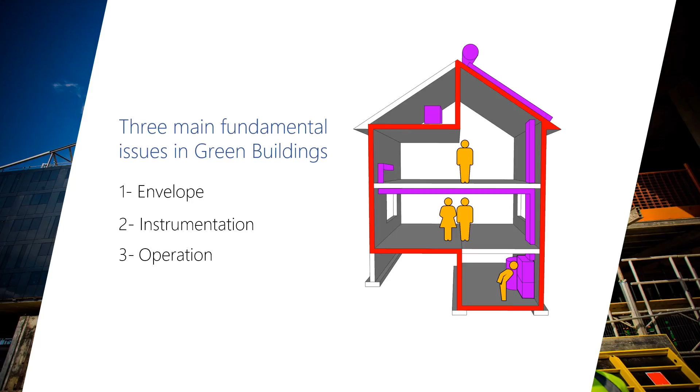Now we will explain each of these items briefly. Envelope.

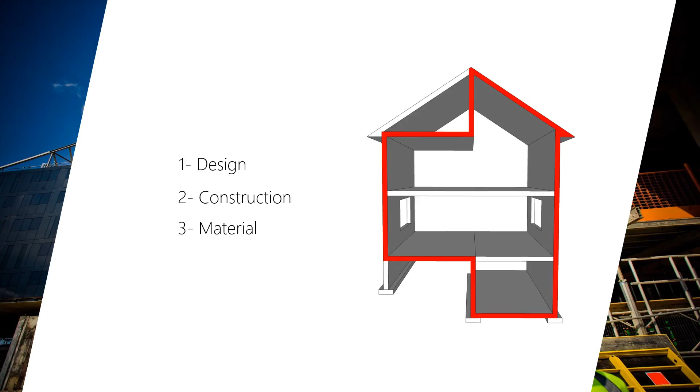Design, construction, and material are the items that should be considered for green building envelope. Envelope design: there are lots of techniques used in building envelope design.

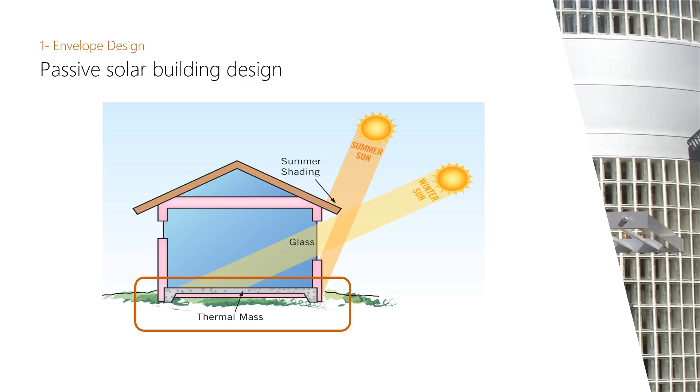One well-known design technique is passive solar building design. It works based on the sun ray angle difference in summer and winter, and also uses thermal mass for saving heat. Thermal mass refers to a dense construction material like stone or concrete.

This short video explains the passive solar building design technique quickly. Enjoy the British accent.

The winter sun shines down into the living rooms. The heat is stored in the thermal mass. As the air inside the house cools during the night, the heat in the thermal mass gets re-released back into the room and helps to maintain the internal temperature, requiring less heating.

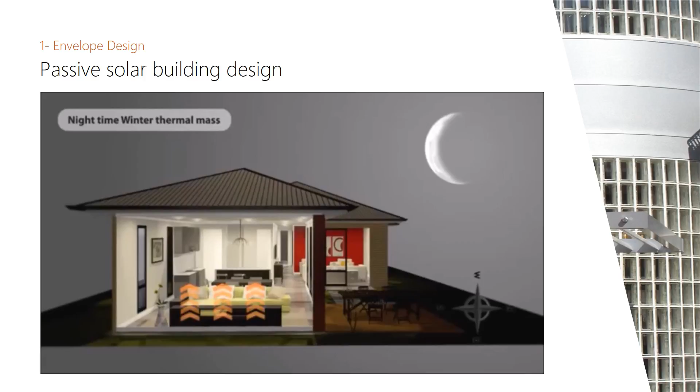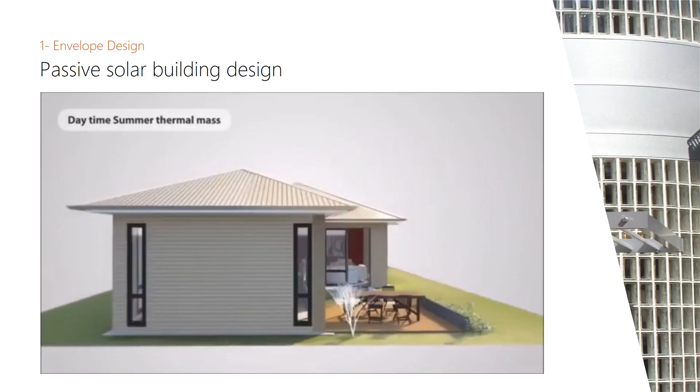In this fly-through of the home, you can see how the winter sun is penetrating into the living room from the north side and how the concrete floor slab is storing that heat to be released at night. You can also see the living room is fully lit from the winter sun, requiring no artificial lighting in the daytime. The summer sun is higher in the sky, so with correctly sized and proportioned eaves and other shading devices, you can keep your home cooler by keeping the heat out.

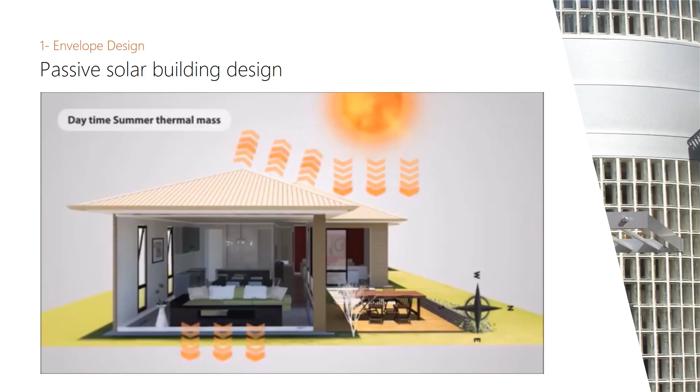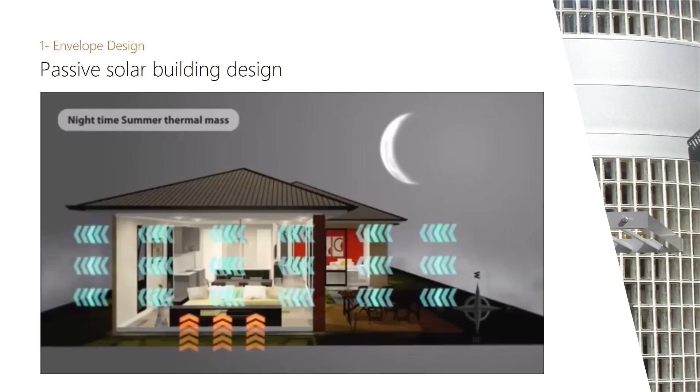During the day, as the air inside the house warms up, it is absorbed by the slab, which is cooler because it is in contact with the cooler earth. This keeps the internal temperature cooler. At night, as the air inside the house cools, the heat from the slab moves back into the room. It's important then to have breezeways which can be used to cool the house by opening windows or doors. Looking at the interior of the home in summer, you can see that occupants are shaded from the harsh sun.

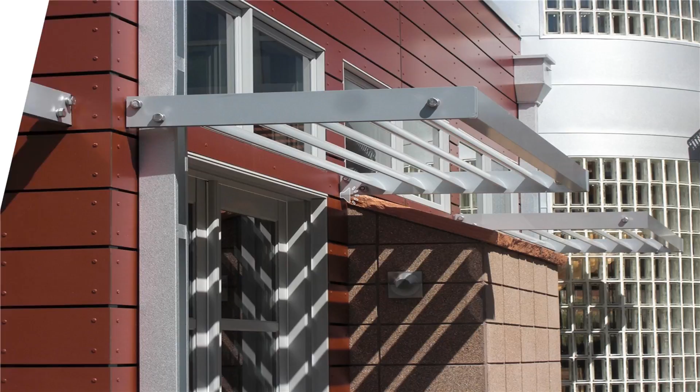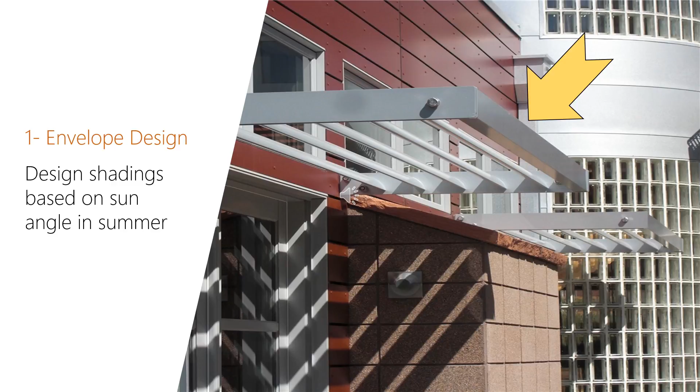There are also some other design techniques. One is adding external window shades based on summer sun angle. The other technique is building perimeter reduction to decrease heat transfer rate with ambient conditions.

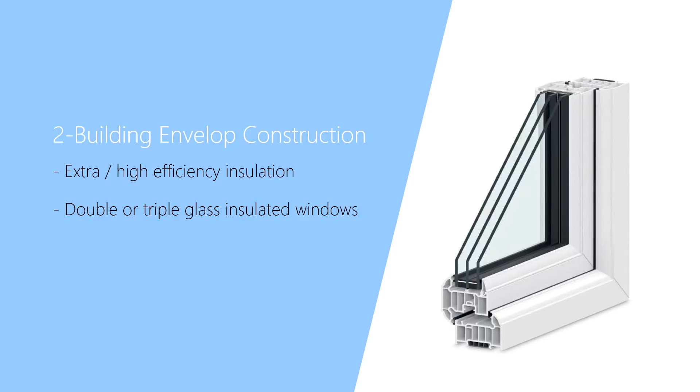Envelope construction: to make a well-insulated envelope, a good quality of insulation elements like extra high efficiency insulation, double or triple glass insulated windows, and sealed doors and openings must be used.

Envelope materials: commitment to environment shouldn't be forgotten anytime. That's why using green construction materials like non-toxic materials, recyclable materials, and possible recycled materials is necessary.

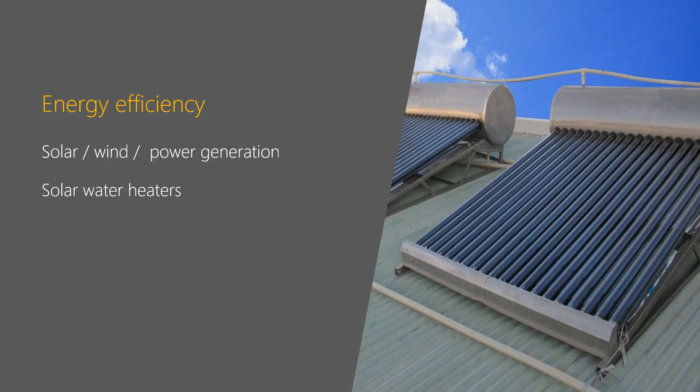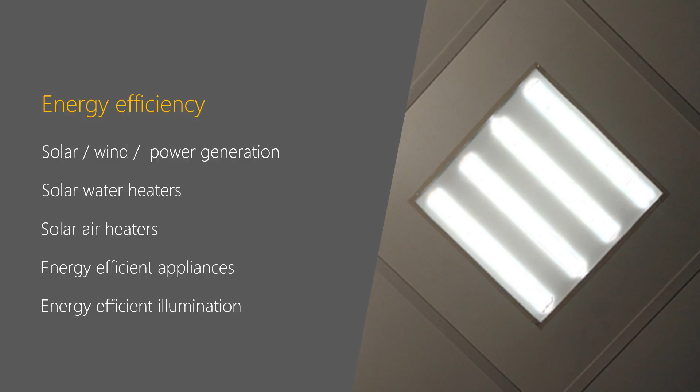Instrumentation. For increasing energy efficiency of the building, various technologies are available. Some of them are solar power generation, solar water heaters, solar air heaters, energy efficient appliances, and energy efficient illumination systems.

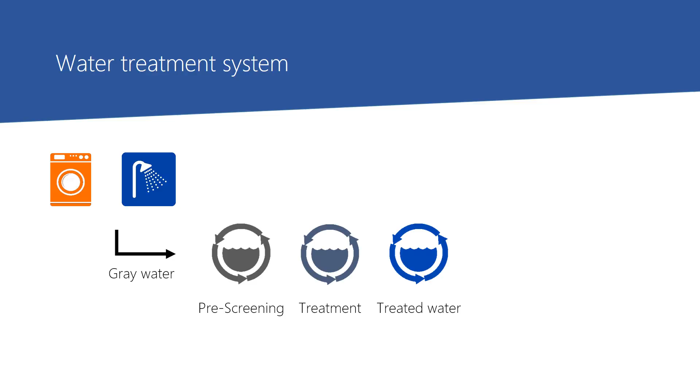For water waste reduction, basic water treatment can be implemented to reuse water in the building. The gray water from washer and shower can be treated in 3 steps and be used for irrigation, toilet flush, and shower again.

Smart home technology. There are lots of stories about smart home technology, but the part related to green buildings is instrumentation controlling and energy management. For example, the building's illumination system could be automatically adjusted based on usage or daylight.

Green building market. Dodge Data and Analytics has released a report about the World Green Building Trend in 2016. The results in this report are drawn from survey respondents from 69 countries around the world.

Based on the report, in 2015, 12% of companies had no project involved in green buildings and 26% had only up to 15% of their projects involved. At the same time, 18% of companies had been involved with green building in 60% or more of their construction projects.

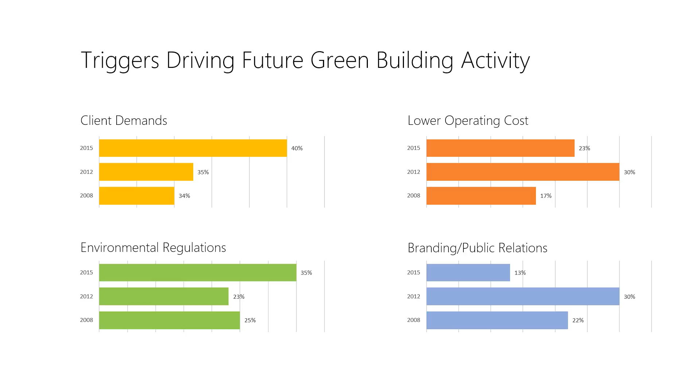While in 2011, about half of construction companies had 15% or fewer green building projects. These graphs present expected use of green buildings in 2017 in Canada. About 80% of institutional projects will be constructed green, 70% of commercial will be green as well, and share of residential new construction is expected to be 60% for houses and townhouses and 50% for high-rises.

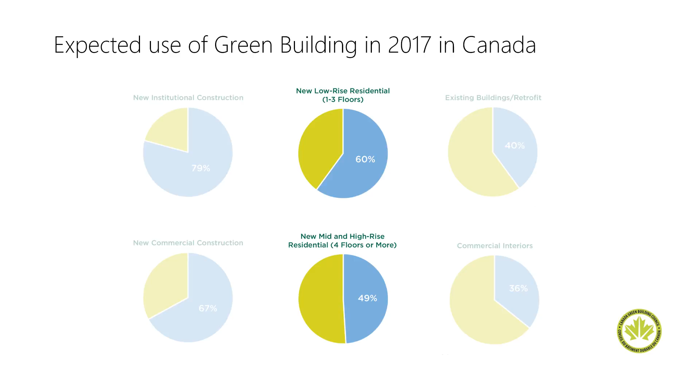Cost of green buildings. Generally, people think that green building is expensive, but based on an RBC Bank financial study about green buildings, constructing a LEED certified building has no extra cost. Getting a silver LEED certification will cost only 1% more. The extra cost for a gold certification is 2.7%, and for a platinum certification it's 7.8%.

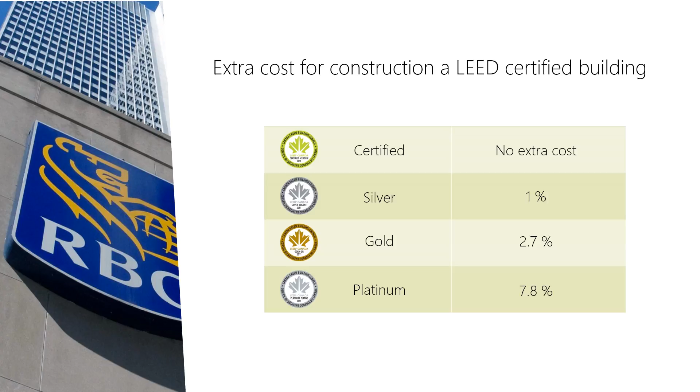The City of Seattle computed the cost of meeting silver LEED standards through all projects in Seattle. The result was 1.7% extra cost in green building projects. In the United States, the cost of 33 green buildings was compared with conventional design for those same buildings.

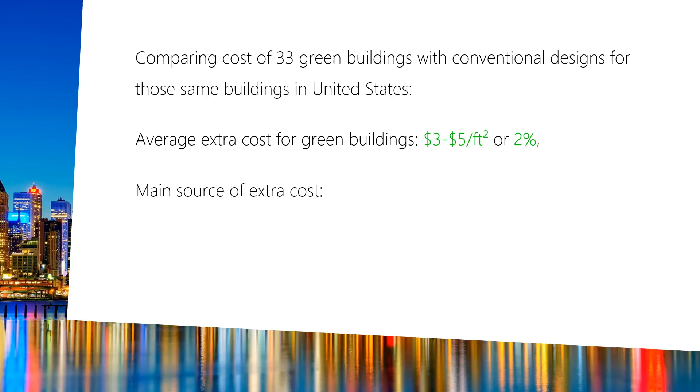As a result, average extra cost for green buildings was $3 to $5 per square feet, equal to 2%. Result analysis was interestingly showing that the main source of extra cost in green building projects is time. In comparison with routine projects, extra time is required for green buildings engineering and architecture design, modeling cost, and integrating sustainable building implementation in the projects.

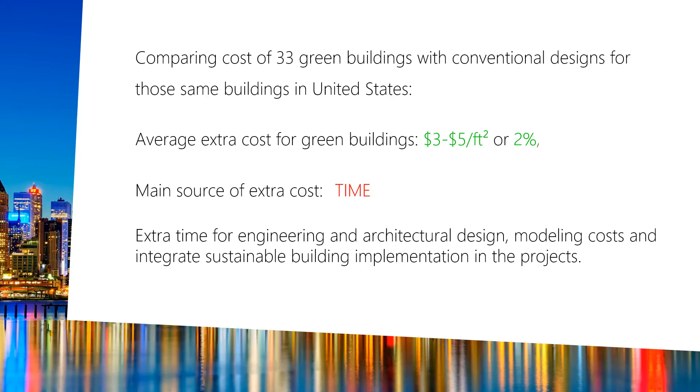Benefits. According to a US Green Building Council report, owners of green buildings see ROI improved by 19% on average for existing green building projects and around 10% on average for new projects. This improvement is because operating costs decreased by 13.6% for new constructions and 8.5% for existing building projects.

Moreover, overall vacancy rate for green buildings in the United States was 15.7%, 4% lower than for non-green buildings. To have a better picture, let's look at rent and sell prices of green buildings in Los Angeles.

The average sell price for a conventional building in LA is $220 per square feet. But the average price for an Energy Star certified building is $244, and for a LEED certified building it's $329 per square feet, which is $109 higher than a regular building.

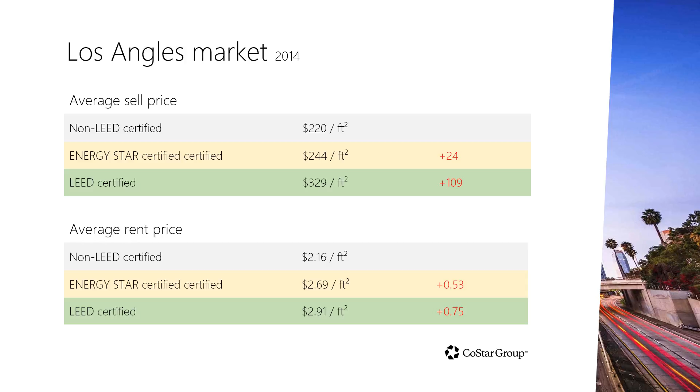For renting a place, average monthly rent for a regular building is $2.16 per square feet. But if you want to pay less on bills, you have to pay 53 cents more for an Energy Star certified building and 75 cents more for a LEED certified building.

The other example is the San Francisco Federal Building located on Mission Street. This building was designed in 2002 and occupied in 2007. The total annual bills for such a building in San Francisco would be about $1.5 million, but this building's bills are only one-third of that, at $500,000.

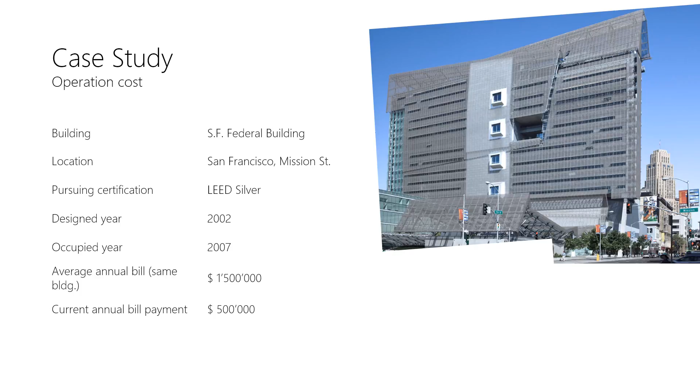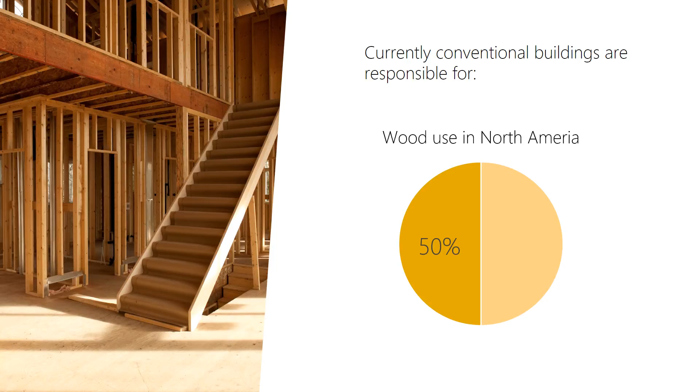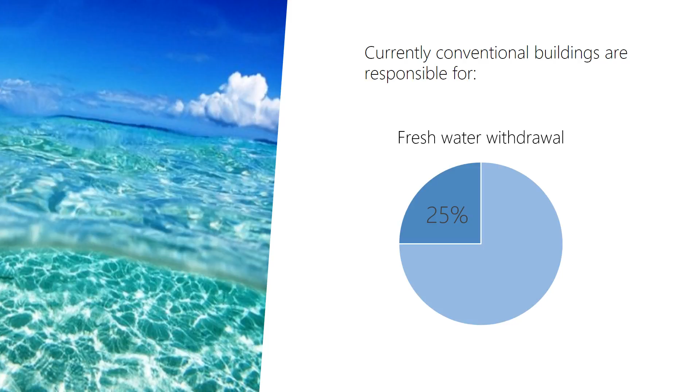Role of governments. Currently, conventional buildings are responsible for 55% of the world's total energy use, 50% of all material and resource use, 50% of wood use in North America, 35% of world's carbon dioxide emission, 25% of freshwater withdrawal, and 80% of potable water use.

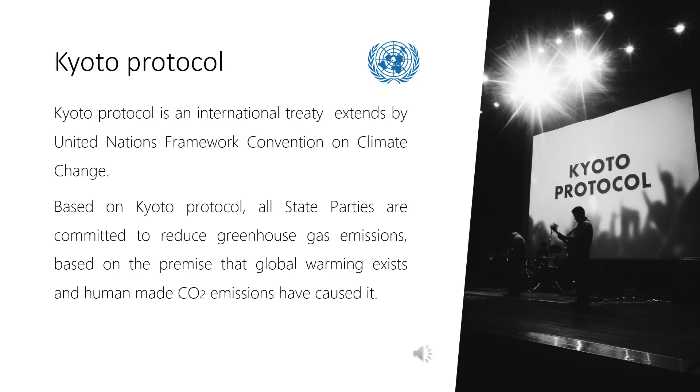As we saw, buildings are making a lot of emissions in the world. Based on the Kyoto Protocol, all countries are committed to reduce greenhouse gas emissions. One of the committed countries to the Kyoto Protocol is Canada. Canada's commitment is a 17% reduction in greenhouse gas emissions from 2005 to 2020.

The Canadian Green Building Council waives registration and certification fees for LEED certified registered charity projects under the Home Affordable Housing Program. Canada Mortgage and Housing Corporation offers a 10% CMHC mortgage loan insurance premium refund to buy an energy-efficient home or make energy-saving renovations. Genworth Canada offers a 10% refund of Genworth mortgage insurance premium to home buyers purchasing an energy-efficient home or making energy-saving renovations.

TD Bank provides a discount rate of 1% lower than the posted 5-year fixed mortgage rate, and TD also offers a cash rebate for certified solar panels. RBC's Energy Mortgage Program offers 1% off the loan interest rate on a home energy audit fixed rate installment loan over $5,000. And BMO's Eco Smart Mortgage offers a mortgage rate of 3.29% on a 5-year fixed mortgage for energy efficient homes.